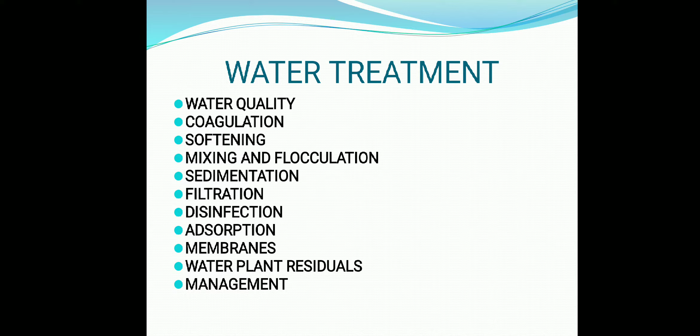Water quality. Precipitation in the form of rain, hail, or sleet contains very few impurities. It may contain trace amounts of mineral matter, gases, and other substances as it forms and falls through the Earth's atmosphere. The precipitation, however, has virtually no bacterial content. Once precipitation reaches the Earth's surface, many opportunities are presented for the introduction of mineral and organic substances, microorganisms, and other forms of pollution.

When water runs over or through the ground surface, it may pick up particles of soil. This is noticeable in the water as cloudiness or turbidity. It also picks up particles of organic matter and bacteria.

As surface water seeps downward into the soil and through the underlying material to the water table, most of the suspended particles are filtered out. This natural filtration may be partially effective in removing bacteria and other particulate materials.

There are four categories used to describe drinking water quality. First is the physical, second is the chemical, third is the microbiological, and lastly is the radiological.

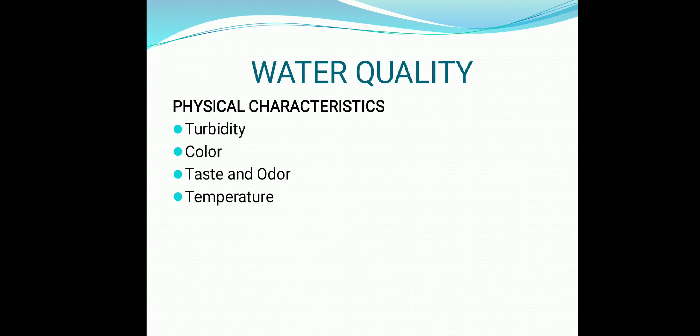Physical characteristics includes turbidity of the water, color, taste and odor, and temperature. Turbidity is the presence of suspended materials such as clay, silt, finely divided organic material, plankton, and other particulate material in water.

Color is dissolved organic material from decaying vegetation, and certain inorganic matter cause color in water. Occasionally, excessive blooms of algae or the growth of aquatic microorganisms may also impart color.

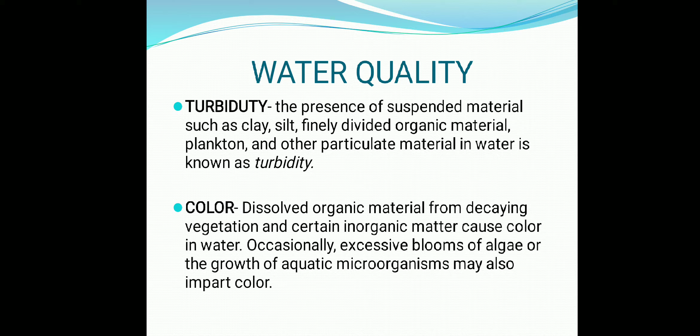Taste and odor in water can be caused by foreign matters such as organic compounds, inorganic salts, or dissolved gases. These materials may come from domestic, agricultural, or natural sources.

Temperature. The most desirable drinking waters are consistently cool and do not have temperature fluctuations of more than a few degrees. Groundwater and surface water from mountainous areas generally meet these criteria.

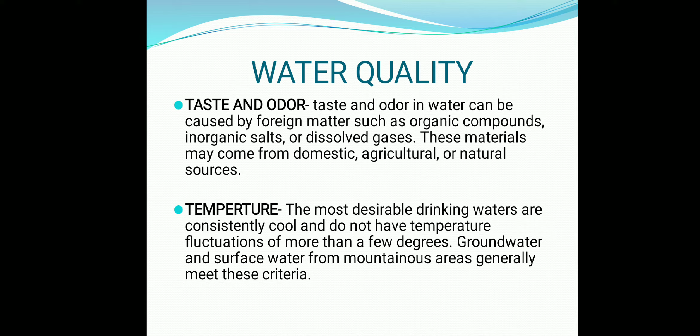In chemical characteristics, there are classifications of chloride, fluoride, iron, lead, manganese, sodium, sulfate, zinc, arsenic, toxic inorganic substance, and toxic organic substance.

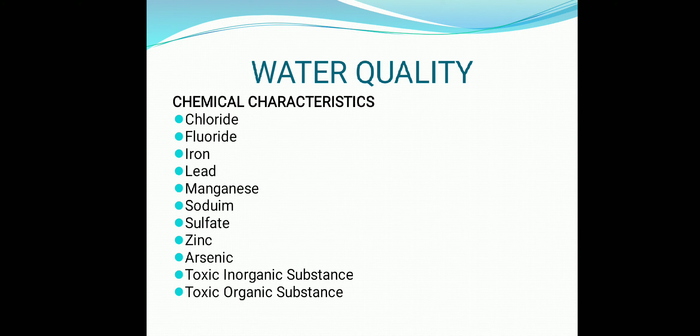Chloride. Most waters contain some chloride. The amount present can be caused by leaching of marine sedimentary deposits or by pollution from sea water, brine, or industrial or domestic wastes. Fluoride: in some areas, water sources contain natural fluoride.

In some areas, water sources contain natural fluoride. Where the concentration approaches optimum levels, beneficial health effects have been observed.

Iron. Small amounts of iron frequently are present in water because of the large amount of iron in the geological materials. The presence of iron in water is considered objectionable because it imparts a brownish color to laundered goods and affects the taste of beverages such as tea and coffee.

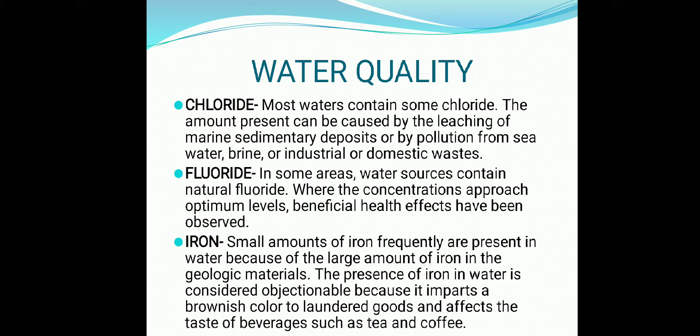Lead. Exposure of the body to lead, however brief, can be seriously damaging to health. Prolonged exposure to relatively small quantities may result in serious illness or death. Lead taken into the body in quantities in excess of certain relatively low normal limits is a cumulative poison.

Manganese imparts a brownish color to water and to cloth that is washed in it. It flavors coffee and tea with a medicinal taste.

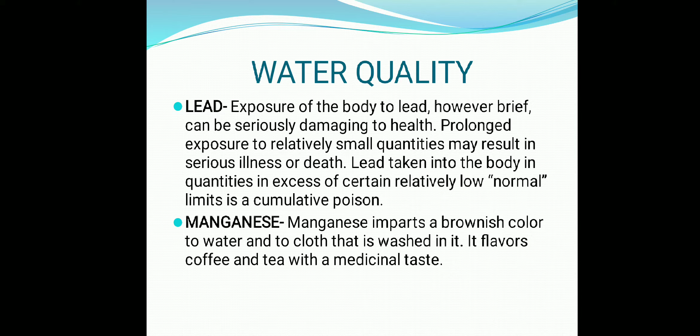Sodium. The presence of sodium in water can affect persons suffering from heart, kidney, or circulation ailments.

Sulfate. Waters containing high concentrations of sulfate caused by leaching of natural deposits of magnesium sulfate or sodium sulfate may be undesirable because of their laxative effects.

Zinc is found in some natural waters, particularly in areas where zinc ore deposits have been mined. Zinc is not considered detrimental to health, but it will impart an undesirable taste to drinking water.

Arsenic occurs naturally in the environment and is also widely used in timber treatment, agricultural chemicals, and manufacturing of gallium arsenide wafers, glass, and alloys. Arsenic in drinking water is associated with lung and urinary bladder cancer.

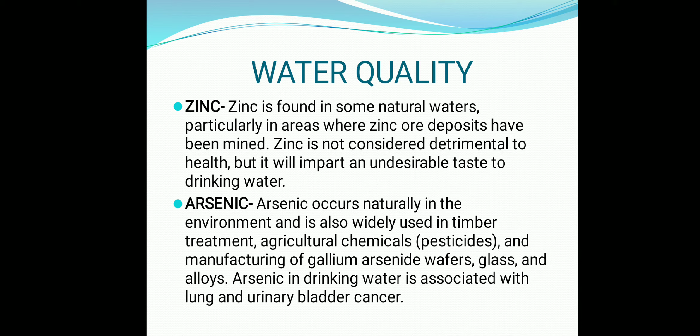Toxic inorganic substances. Nitrates, cyanides, and heavy metals constitute the major classes of inorganic substances of health concern. Methemoglobinemia, or infant cyanosis, also known as blue baby syndrome, has occurred in infants who have been given water or fed formula prepared with water having high concentrations of nitrate.

Toxic organic substances. There are over 120 organic compounds listed in the U.S. Environmental Protection Agency's Priority Pollutant List. These include pesticides, insecticides, and solvents. Like the inorganic substances, their effects may be acute or chronic.

Microbiological characteristics: water for drinking and cooking purposes must be made free from disease-producing organisms or pathogens. These organisms include viruses, bacteria, protozoa, and helminths. Some organisms which cause disease in people originate from the fecal discharges of infected individuals, while others come from the fecal discharge of animals.

Radiological characteristics: development of atomic energy as a power source, mining of radioactive materials, and naturally occurring radioactive materials have made it necessary to establish limiting concentrations for the intake of radioactive substances into the body, including through drinking water. The effects of human exposure to radiation are harmful, and any unnecessary exposure should be avoided, though humans have always been exposed to natural radiation from water, food, and air.

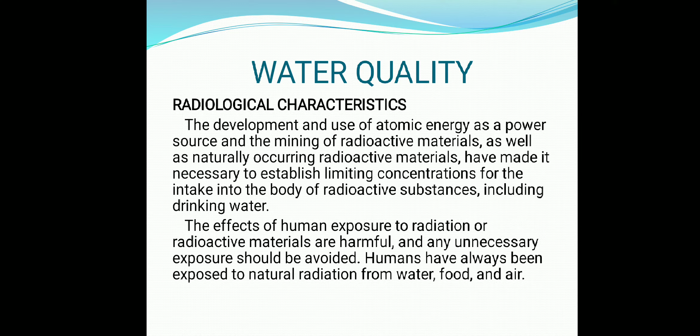Let's proceed to water classification and treatment systems. Potable water is most conveniently classified by its source, that is groundwater or surface water. Generally, groundwater is uncontaminated but may contain aesthetically or economically undesirable impurities, though it can be influenced by man-made spills and become contaminated. Surface water must be considered contaminated with bacteria, viruses, or inorganic substances that could present a health hazard.

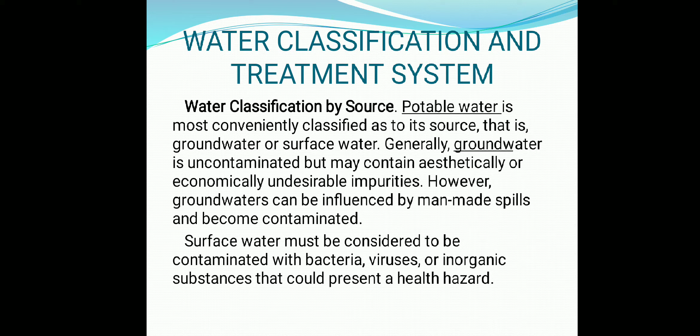Treatment systems can be classified as simple disinfection, filter plants, or softening plants. Plants employing simple chlorination are usually groundwater sources with high water quality, chlorinating to ensure the water reaching customers contains safe bacterial levels. A groundwater source can contain naturally occurring contaminants such as arsenic, fluoride, radionuclides, iron, or manganese. In this case, the water may be treated by adsorption, ion exchange, or precipitation processes to remove the contaminant.

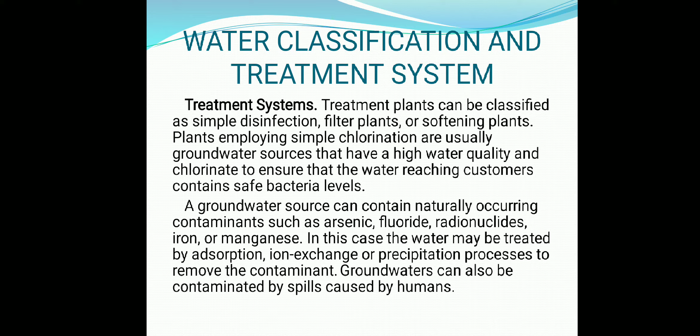Groundwaters can also be contaminated by human-caused spills. In a filtration plant, rapid mixing, flocculation, sedimentation, filtration, and disinfection are employed to remove color, turbidity, taste and odors, organic matter, and bacteria.

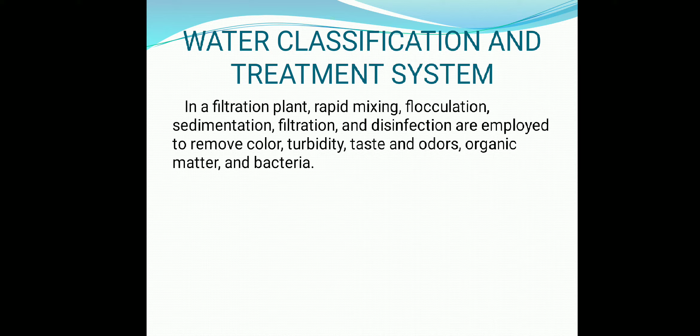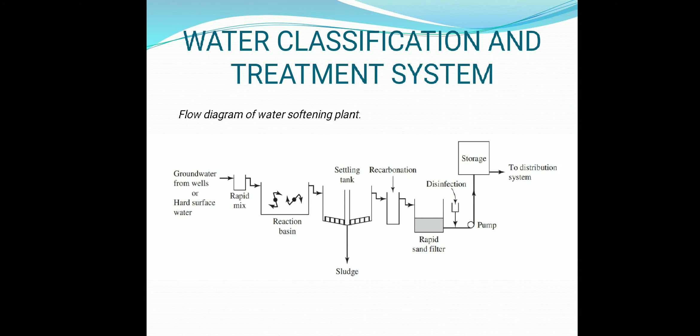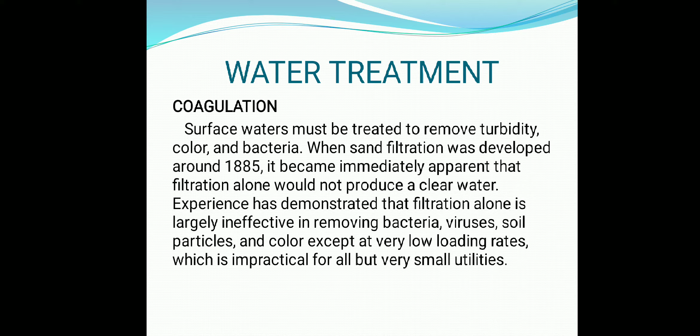Now let's proceed to water treatment, first the coagulation process. Surface waters must be treated to remove turbidity, color, and bacteria. When sand filtration was developed around 1885, it became immediately apparent that filtration alone would not produce clear water. Experience has demonstrated that filtration alone is largely ineffective in removing bacteria, viruses, soil particles, and color, except at very low loading rates, which is impractical for all but very small utilities.

The objective of coagulation and subsequent flocculation is to turn the small particles of color, turbidity, and bacteria into large flocs, either as precipitates or suspended particles. These flocs are then conditioned so that they will be readily removed in subsequent processes.

Technically, coagulation applies to the removal of colloidal particles, and in this chapter coagulation will refer to colloid removal only. We define coagulation as a method to alter the colloids so that they are able to approach and adhere to each other, forming larger flocculated particles.

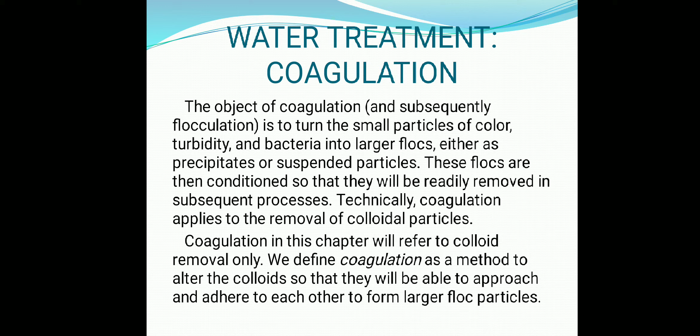Colloid stability: colloids are suspended in solution and can't be removed by sedimentation or filtration. The particles in the colloid range are too small to settle in a reasonable time period and too small to be trapped in the pores of a filter. For colloids to remain stable, they must remain small. Most colloids are stable because they possess a negative charge that repels other colloidal particles before they collide with one another.

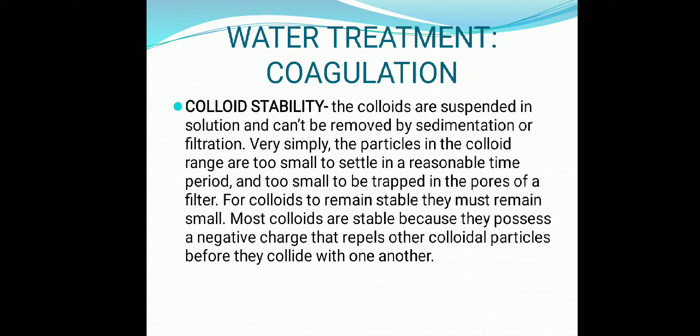Colloid stabilization: colloids are stable because of their surface charge. In order to destabilize the particles, we must neutralize this charge. Some neutralization can take place by the addition of an ion of opposite charge to the colloid. Since most colloids found in water are negatively charged, the addition of a sodium ion, Na+, should reduce the charge.

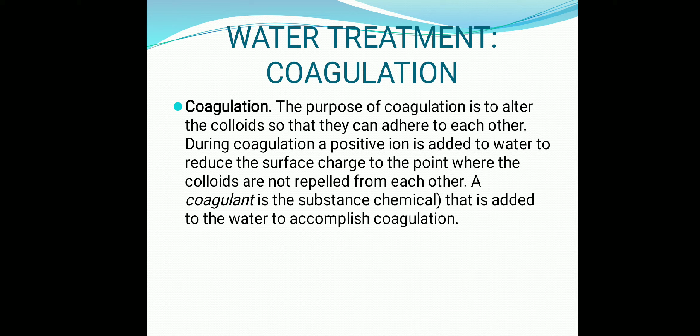Coagulation: the purpose of coagulation is to alter the colloids so that they can adhere to each other. During coagulation, a positive ion is added to the water to reduce the surface charge to the point where the colloids are not repelled from each other. A coagulant is a chemical substance that is added to water to accomplish coagulation.

There are three key properties of a coagulant. First is trivalent cation: as indicated previously, the colloids most commonly found in natural waters are negatively charged, hence a cation is required to neutralize the charge, and a trivalent cation is the most efficient cation.

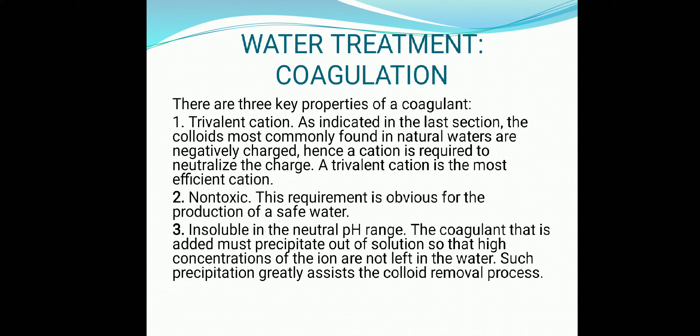The second property is non-toxic, which is obvious for the production of safe water. The third is insoluble in the neutral pH range: the coagulant added must precipitate out of solution so that high concentrations of the ion are not left in the water, as such precipitation greatly assists the colloid removal process.

So, the four basic types of coagulant aids are: first, the pH adjuster; second, activated silica; third, clay; and fourth, polymers.

Let's proceed to softening. First, a classification is hardness. The term hardness is used to characterize a water that does not lather well, causes a scum in the bathtub, and leaves hard, white, crusty deposits or scale on coffee pots, tea kettles, and hot water heaters. The failure of lather and the formation of scum on bathtubs is the result of the reactions of calcium and magnesium with the soap.

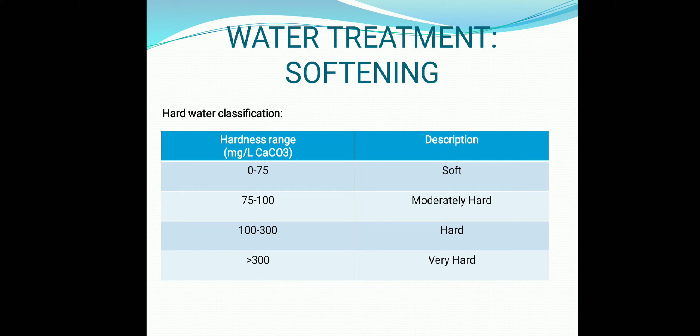So hard water classification has ranges, from milligram per liter. In the description: 0 to 75 is soft, 75 to 100 is moderately hard, 100 to 300 is hard, and greater than 300 is very hard.

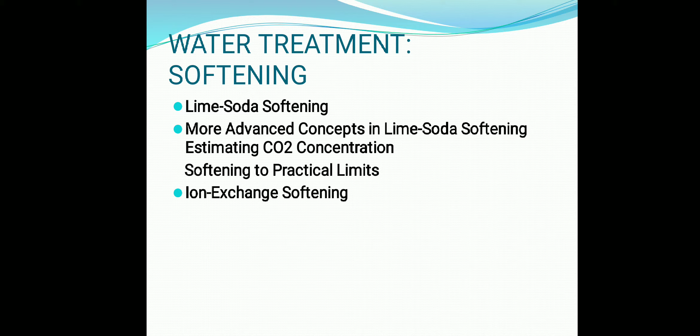Lime soda softening model. More advanced concepts in lime soda softening include estimating carbon dioxide concentration, softening to practical limits, and ion exchange softening.

Mixing and flocculation. Mixing, or rapid mixing as it is called, is the process whereby chemicals are quickly and uniformly dispersed in the water. Ideally, the chemicals would be instantaneously dispersed throughout the water.

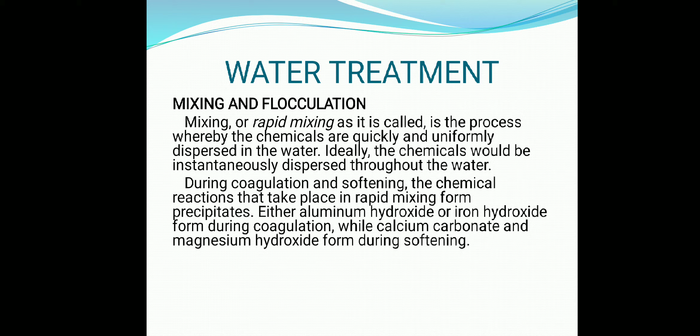During coagulation and softening, the chemical reactions that take place in rapid mixing form precipitates. Either aluminum hydroxide or iron hydroxide forms during coagulation, while calcium carbonate and magnesium hydroxide form during softening.

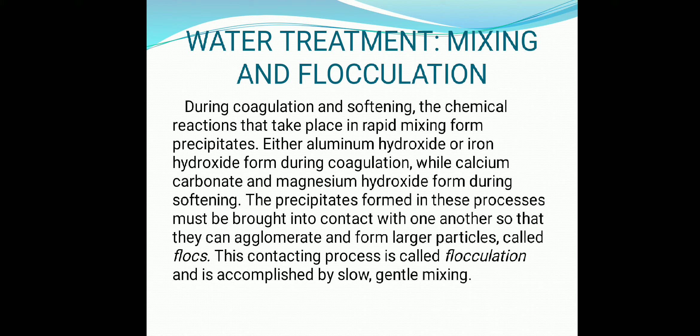The precipitates formed in these processes must be brought into contact with one another so that they can agglomerate and form larger particles, called floc. This contacting process is called flocculation and is accomplished by slow, gentle mixing.

In the treatment of water and wastewater, the degree of mixing is measured by the velocity gradient G. The velocity gradient is best thought of as the amount of shear taking place; the higher the G value, the more violent the mixing.

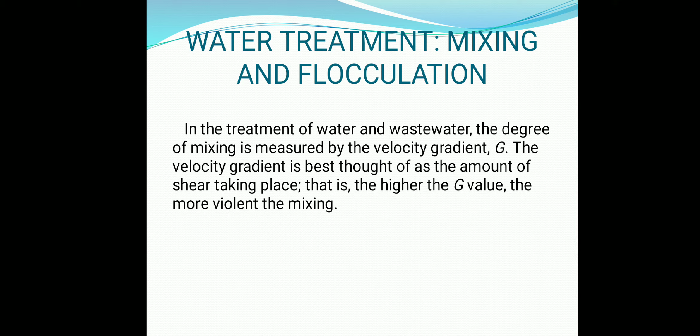Rapid mix: rapid mixing is probably the most important physical operation affecting coagulant efficiency. Rapid mixing can be accomplished within a tank utilizing a vertical shaft mixer.

Flocculation. The objective of flocculation is to bring particles into contact so that they will collide, stick together, and grow to a size that will readily settle. Enough mixing must be provided to bring the floc into contact and to keep the floc from settling in the flocculation basin.

Sedimentation: particles that will settle within a reasonable period of time can be removed in a sedimentation basin, also called a clarifier. Sedimentation basins are usually rectangular or circular with either a radial or upward water flow pattern. Regardless of the type of basin, the design can be divided into four zones: inlet, settling, outlet, and sludge storage.

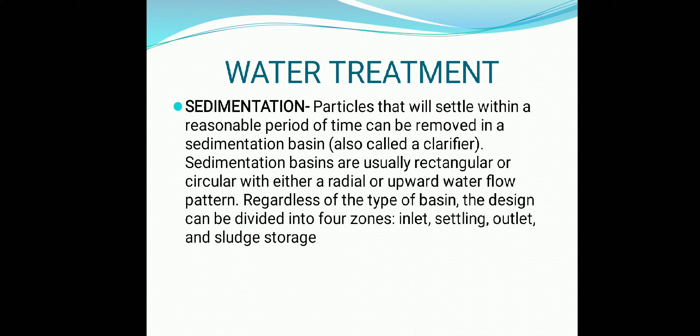So, these are the zones of a sedimentation tank.

Sedimentation concept: there are two important terms to understand in sedimentation zone design. The first is the particle settling velocity. The second is the velocity at which the tank is designed to operate, called the overflow rate.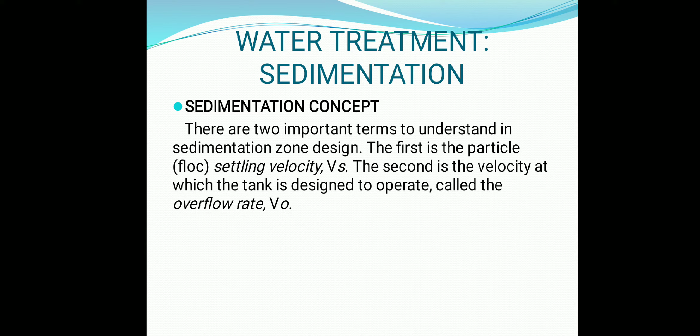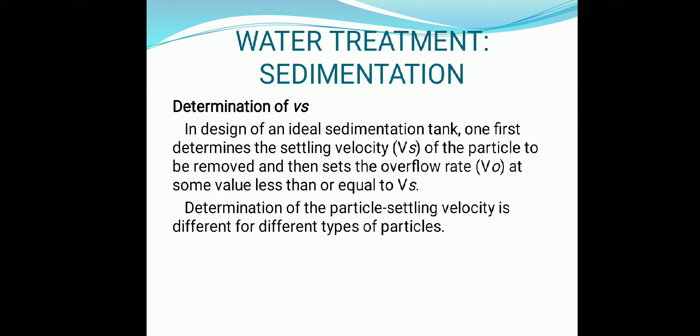Determination of velocity: in the design of an ideal sedimentation tank, one first determines the settling velocity of the particle to be removed, then sets the overflow rate at some value less than or equal to the settling velocity. Determination of the particle settling velocity is different for different types of particles.

Settling properties of particles are often categorized into one of three classes. Type 1 sedimentation is characterized by particles that settle discretely at a constant settling velocity. They settle as individual particles and do not flocculate or stick to other particles during settling. Examples of these particles are sand and grit material. Generally speaking, the only application of type 1 settling is during pre-sedimentation for sand removal prior to coagulation in a potable water plant, and settling of sand particles during cleaning of rapid sand filters and in grit chambers.

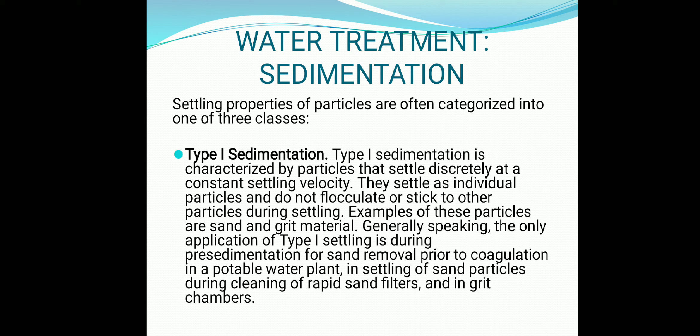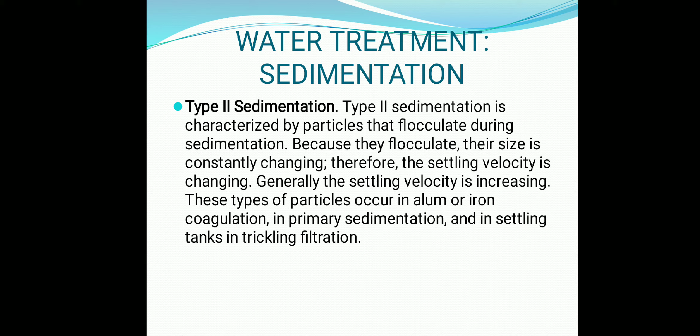Type 2 sedimentation is characterized by particles that flocculate during sedimentation. Because they flocculate, their size is constantly changing, and therefore the settling velocity is changing—generally increasing. This type of particle occurs in alum or iron coagulation, in primary sedimentation, and in settling tanks in trickling filtration.

Type 3, or zone sedimentation: in zone sedimentation, the particles are at high concentration, greater than 1,000 mg per liter, such that the particles tend to settle as a mass, and a distinct clear zone and sludge zone are present. Zone settling occurs in lime softening sedimentation, activated sludge sedimentation, and sludge thickening.

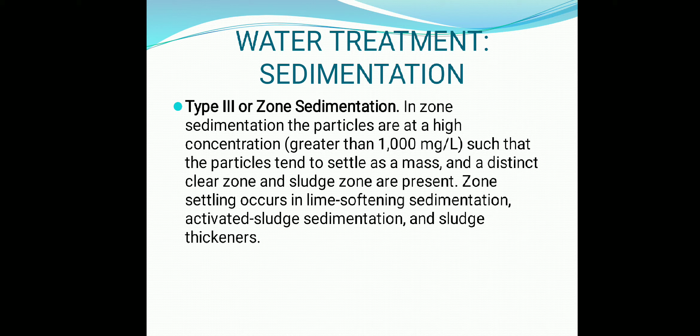Determination of velocity: there are different ways to determine effective particle settling velocity and consequently to determine overflow rates. First is discrete settling. In the case of type 1 sedimentation, the particle's settling velocity can be calculated and the basin designed to remove a specific size particle.

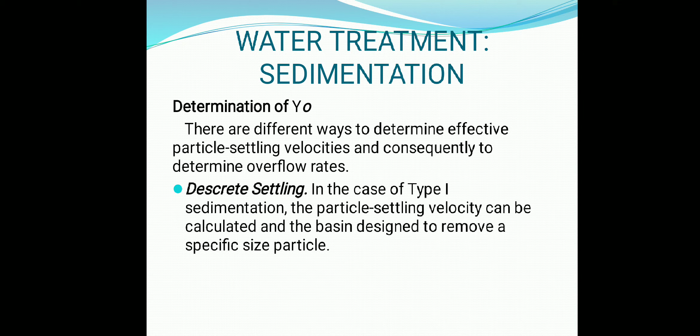Next treatment is filtration. Water filtration is a process for separating suspended or colloidal impurities from water by passage through a porous medium, usually a bed of sand or other medium. Water fills in the pores, the open spaces between the sand particles, and the impurities are left behind, either clogged in the open spaces or attached to the sand itself.

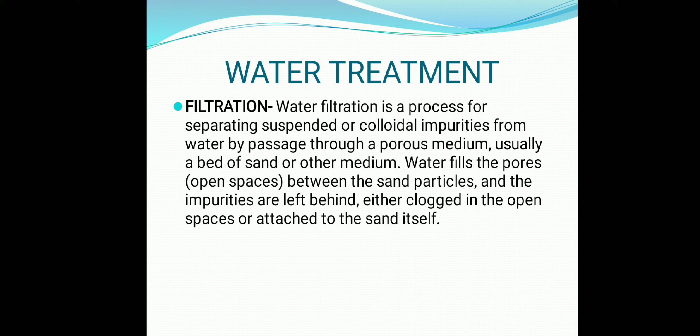Methods of classifying filters: according to the type of medium used, such as sand, coal called anthracite, dual media, or mixed media; and by allowable loading rate, which is the flow rate of water applied per unit area of the filter. It is the velocity of the water approaching the face of the filter.

Disinfection is used in water treatment to reduce pathogens to an acceptable level. Disinfection is not the same as sterilization. Sterilization implies the destruction of all living organisms. Drinking water does not need to be sterile. Three categories of human enteric pathogens are normally of consequence: bacteria, virus, and amoebic cysts. Purposeful disinfection must be capable of destroying all three.

To be of practical service, such water disinfectants must possess the following properties. They must destroy the kinds and numbers of pathogens that may be introduced into water within a practicable period of time over an expected range in water temperature.

They must meet possible fluctuations in composition, concentration, and condition of waters or wastewater to be treated. They must be neither toxic to humans and domestic animals, nor unpalatable or otherwise objectionable in required concentrations.

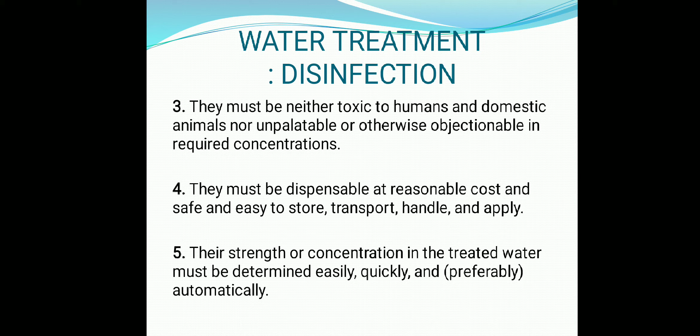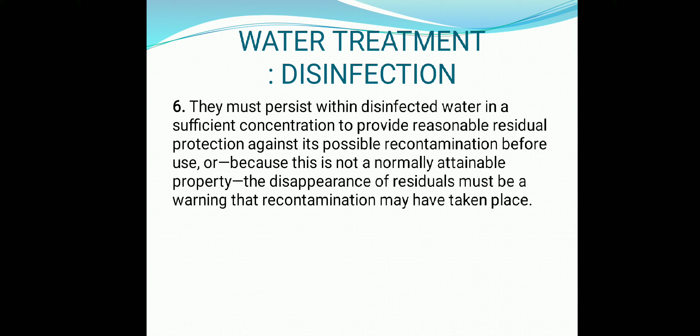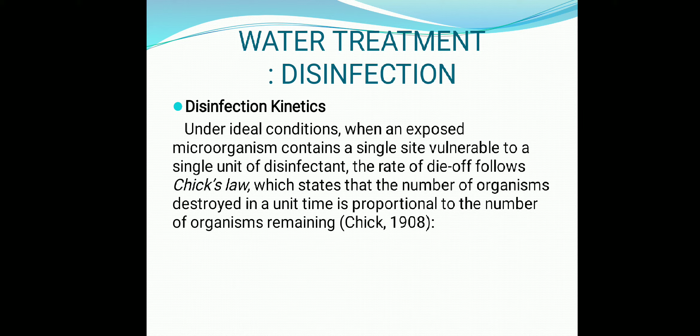Chlorine reaction in water. Chlorine is the most common disinfecting chemical used. The term chlorination is often used synonymously with disinfection. Chlorine may be used as the element Cl2, as sodium hypochlorite, and or calcium hypochlorite. When chlorine is added to water, a mixture of hypochlorous acid and hydrochloric acid is formed.

Chlorine disinfecting action. Chlorine disinfection involves a very complex series of events and is influenced by the kind and extent of reactions with chlorine-reactive materials, including nitrogen, temperature, pH level, availability of test organisms, and numerous other factors. Such factors greatly complicate attempts to determine the precise mode of action of chlorine on bacteria and other microorganisms.

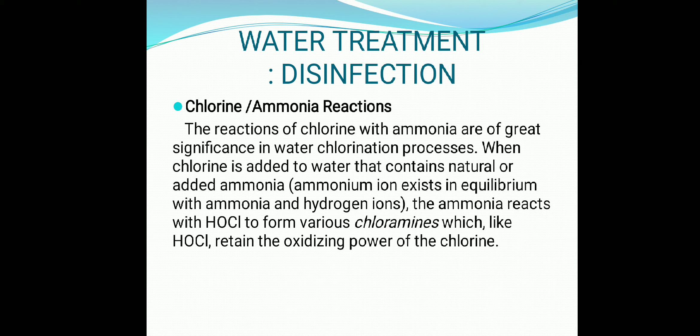Chlorine-ammonia reactions. The reactions of chlorine with ammonia are of great significance in water that contains natural or added ammonia. The ammonia reacts with hypochlorous acid to form various chloramines which, like hypochlorous acid, retain the oxidizing power of the chlorine.

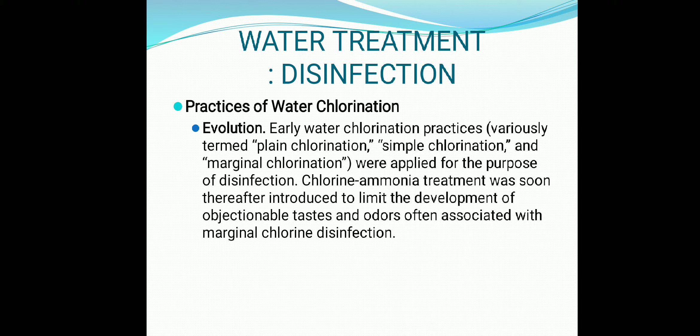Practices of water chlorination: the evolution. Early water chlorination practices, variously termed plain chlorination, simple chlorination, and marginal chlorination, were applied for the purpose of disinfection. Chlorine-ammonia treatment was soon thereafter introduced to limit the development of objectionable tastes and odor, often associated with marginal chlorine disinfection.

Combined residual chlorination. Combined residual chlorination practice involves the application of chlorine to water in order to react with natural or added ammonia, producing a combined available chlorine residual, and to maintain that residual throughout part or all of a water treatment plant or distribution system.

Free residual chlorination. Free residual chlorination practice involves the application of chlorine to water to produce, either directly or through the destruction of ammonia, a free available chlorine residual, and to maintain that residual throughout part or all of a water treatment plant or distribution system. Free available chlorine forms have higher oxidation potentials than combined available chlorine forms and therefore are more effective as oxidants.

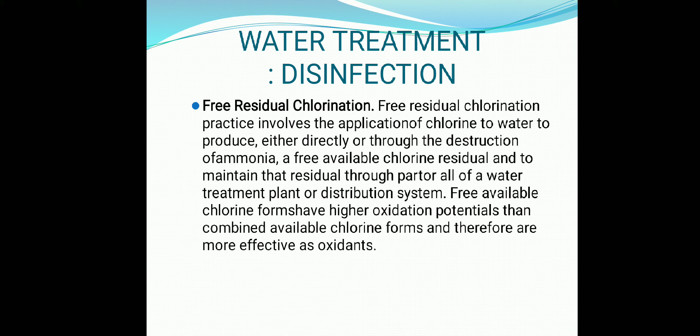Chlorine dioxide. Another very strong oxidant is chlorine dioxide, formed on-site by combining chlorine and sodium chlorite. Chlorine dioxide is often used as a primary disinfectant, inactivating bacteria and cysts, followed by the use of chloramine as a distribution system disinfectant. Chlorine dioxide does not maintain a residual long enough to be useful as a distribution system disinfectant. The advantage of chlorine dioxide over chlorine is that chlorine dioxide does not react with precursors to form THMs.

Ozonation. Ozone is a pungent smelling, unstable gas. It is a form of oxygen in which three atoms of oxygen combine to form the molecule O3. Because of its instability, it is generated at the point of use. The ozone generating apparatus is commonly a discharge electrode. To reduce corrosion of the generating apparatus, air is passed through a drying process and then into the ozone generator.

Advanced oxidation process. Advanced oxidation processes are combinations of disinfectants designed to produce hydroxyl radicals. Hydroxyl radicals are highly reactive, non-selective oxidants able to decompose many organic compounds. Most noteworthy of the advanced oxidation processes is ozone plus hydrogen peroxide.

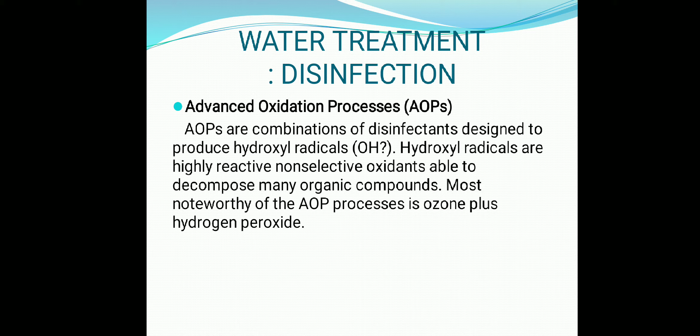Adsorption. Adsorption is a mass transfer process wherein a substance is transferred from the liquid phase to the surface of a solid where it is bound by chemical or physical forces. Generally, in water treatment, the adsorption solid is activated carbon, either granular or powdered, PAC.

Powdered activated carbon, PAC, is fed to the raw water in a slurry and is generally used to remove taste and odor causing substances, or to provide some removal of synthetic organic chemicals.

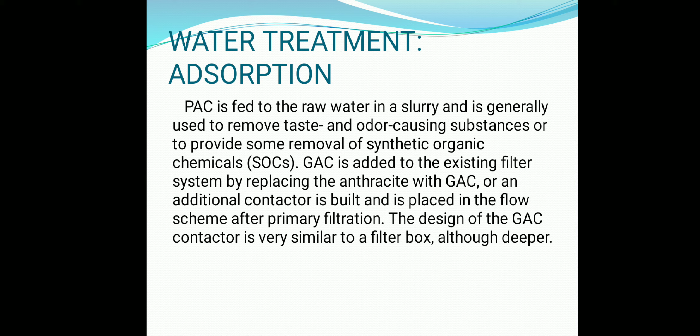GAC is added to the existing filter system by replacing the anthracite with GAC, or an additional contactor is built and placed into the flow scheme after primary filtration. The design of a GAC contactor is very similar to the filter box, although deeper.

Membranes. A membrane is a thin layer of material capable of separating materials as a function of their physical and chemical properties when a driving force is applied across the membrane. In water treatment, the driving force is applied using a high-pressure pump, and the membrane type is selected based on the constituents to be removed.

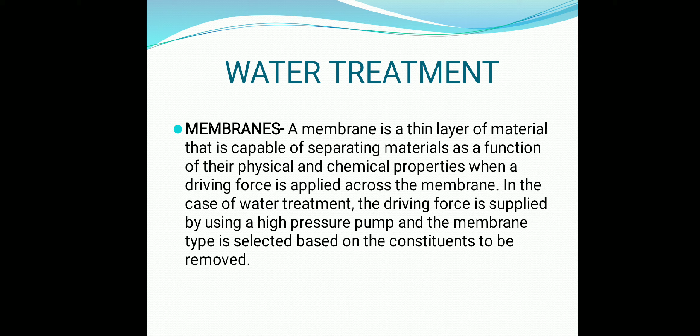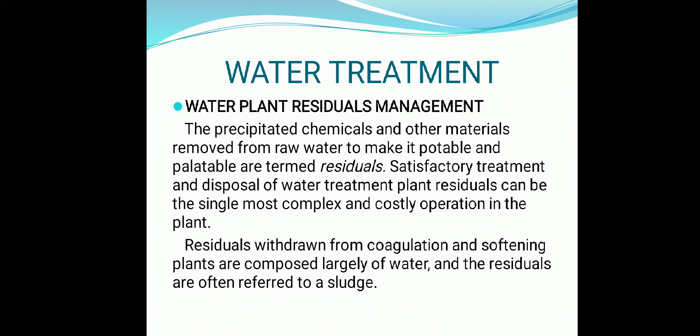Water plant residuals management. Precipitated chemicals and other materials removed from raw water to make it potable and palatable are termed residuals. Satisfactory treatment and disposal of water treatment plant residuals can be the single most complex and costly operation in the plant. Residuals withdrawn from coagulation and softening plants are composed largely of water, and the residuals are often referred to as sludge.

Water plant and residual management. As much as 98% of the sludge mass may be water. Thus, for example, 20 kg of solid chemical precipitate is accompanied by 980 kg of water. Assuming equal densities for the precipitate and water, approximately 1 cubic meter of sludge is produced for each 20 kg of chemicals added to the water.

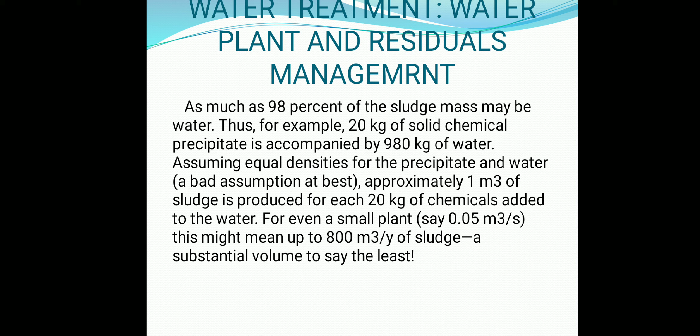For even a small plant, this might mean up to 800 cubic meters per year of sludge, a substantial volume to say the least. Water treatment plant residuals can be broadly divided into four general categories.

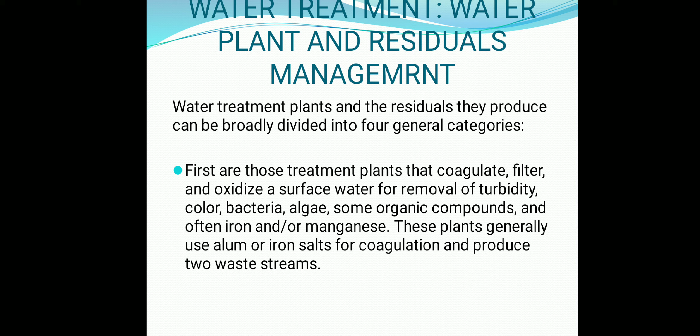First are those treatment plants that coagulate, filter, and oxidize a surface water for removal of turbidity, color, bacteria, algae, some organic compounds, and often iron and or manganese. These plants generally use alum or iron salts for coagulation and produce two waste streams.

The second type of treatment plants are those that practice softening and removal of calcium and magnesium by the addition of lime, sodium hydroxide, and or soda ash. These plants produce clarifier basin sludge and SFBW.

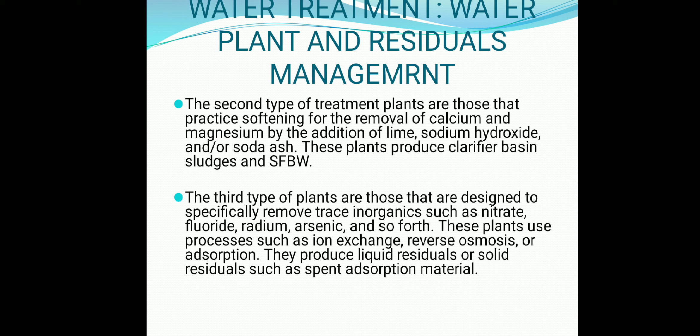The third type of plants are those designed to specifically remove trace inorganics such as nitrate, fluoride, radium, arsenic, and so forth. These plants use processes such as ion exchange, reverse osmosis, or adsorption, and they produce liquid residuals or solid residuals such as spent adsorption material.

The fourth category of treatment plants are those that produce air phase residuals during the stripping of volatile compounds. The major types of treatment plant residuals produced are shown in Table 6-19. Because 95% of the residuals produced are coagulant or softening sludge, they will be stressed in this section.

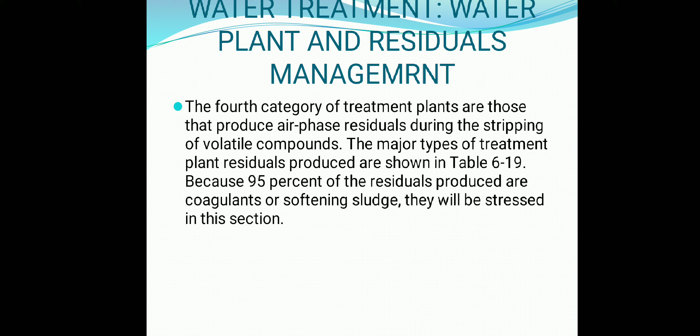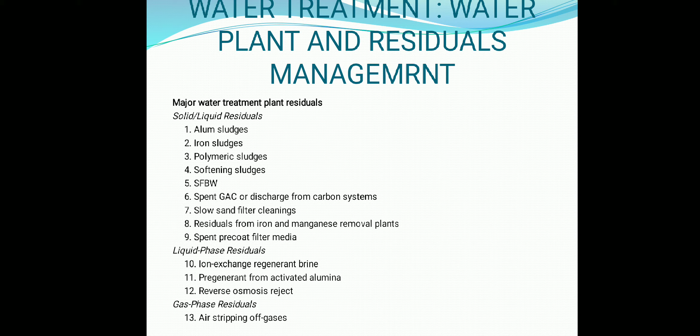Liquid phase residuals include ion exchange regenerant brine and regenerant from activated alumina, as well as reverse osmosis reject. Gas phase residuals come from air stripping off-gases.

The most logical sludge management program attempts to use the following approach in disposing of the sludge: first, minimization of sludge generation; chemical recovery of precipitates; sludge treatment to reduce volume; and alternate disposal in an environmentally safe manner. Sludge production and characteristics: in water treatment plants, sludge is most commonly produced in the following treatment processes: pre-sedimentation, sedimentation, and filtration.

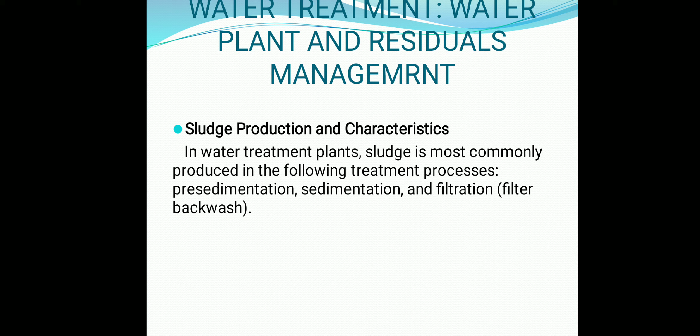Pre-sedimentation: when surface waters withdrawn from watercourses contain a large quantity of suspended materials, pre-sedimentation prior to coagulation may be practiced. The purpose is to reduce the accumulation of solids in subsequent units. The settled material generally consists of fine sands, silt, clays, and organic decomposition products.

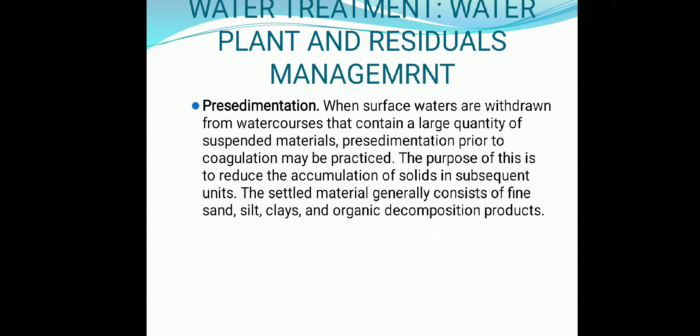Softening sedimentation basin: the residues from softening by precipitation with lime and soda ash will vary from a nearly pure chemical to a highly variable mixture. The softening process discussed earlier in this chapter produces a sludge containing primarily calcium carbonate and...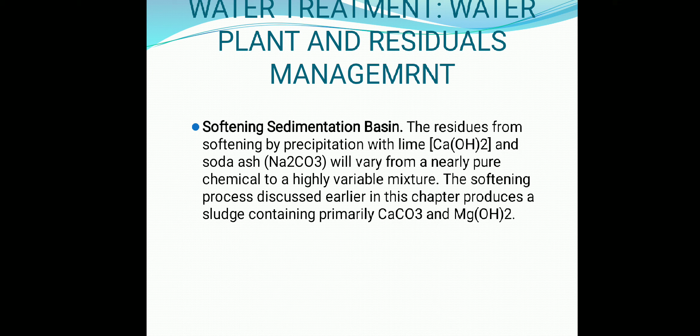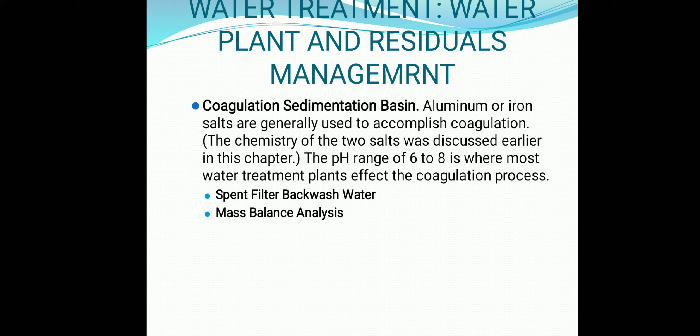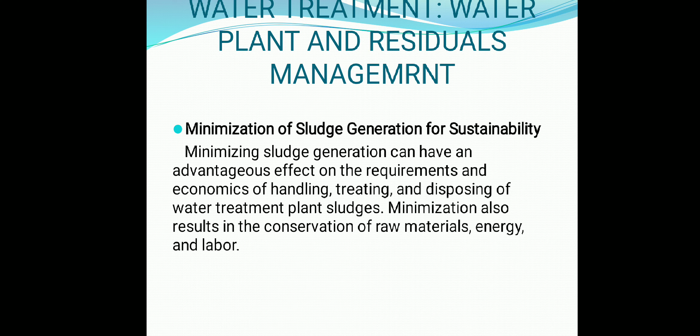Minimization of sludge generation for sustainability. Minimizing sludge can have an advantageous effect on the requirements and economics of handling, treating, and disposing of water treatment plant sludges. Minimization also results in conservation of raw materials, energy, and labor.

There are three methods to minimize the quantity of metal hydroxide precipitates in the sludge: first, changing the water treatment process to direct filtration; substituting other coagulants, in particular using polymers that are more effective at lower dosage; and conserving chemicals by determining optimum dosage at frequent intervals as raw water characteristics change.

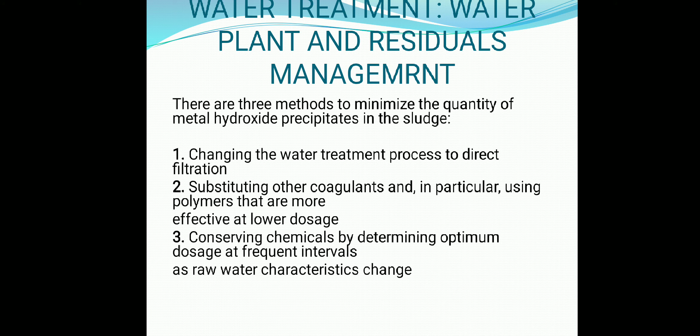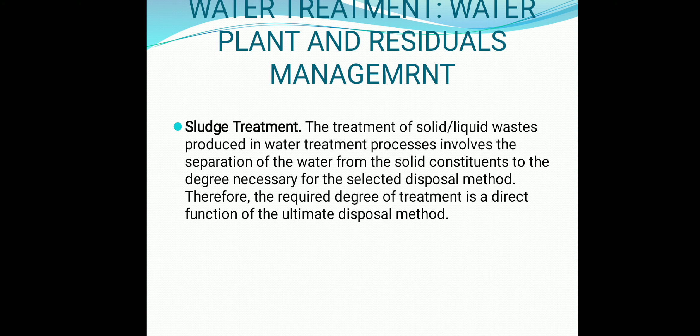Sludge treatment: the treatment of solid-liquid waste produced in water treatment processes involves separation of the water from the solid constituents to the degree necessary for the selected disposal method. Therefore, the required degree of treatment is a direct function of the ultimate disposal method.

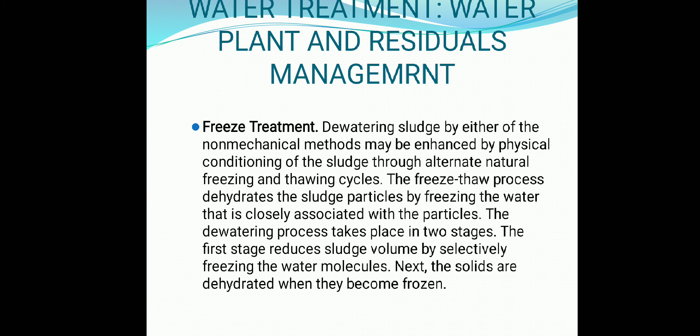Centrifuging: a centrifuge uses centrifugal force to speed up the separation of sludge particles from the liquid. In a typical unit, sludge is pumped into a horizontal cylindrical bowl rotating 800 to 2000 revolutions per minute. Polymers used for sludge conditioning are also injected into the centrifuge. The solids are spun to the outside of the bowl, where they are scraped out by the screw conveyor. The liquid, or centrate, is returned to the treatment plant.

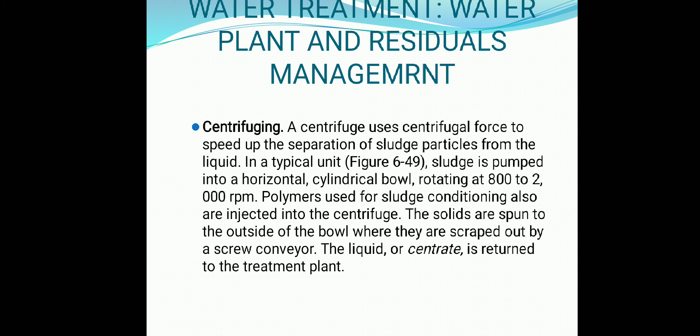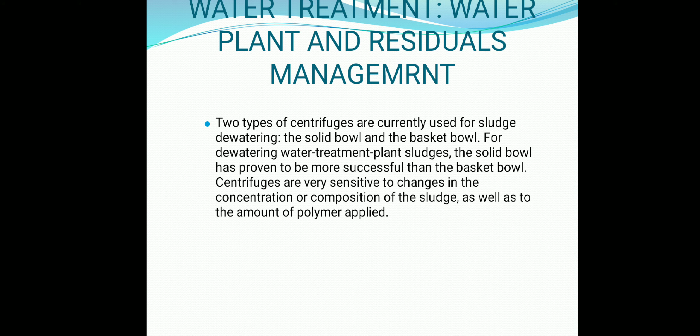Two types of centrifuges are currently used for sludge dewatering: the solid bowl and the basket bowl. For dewatering water treatment plant sludges, the solid bowl has proven more successful than the basket bowl.

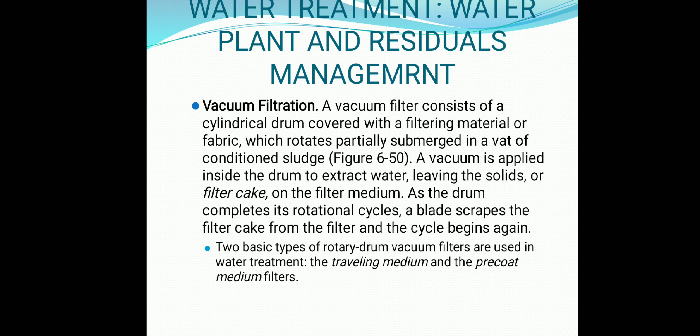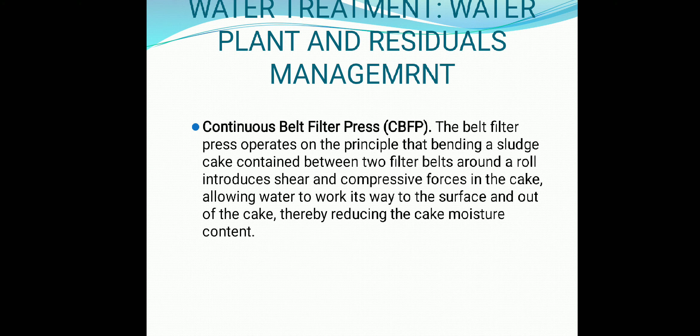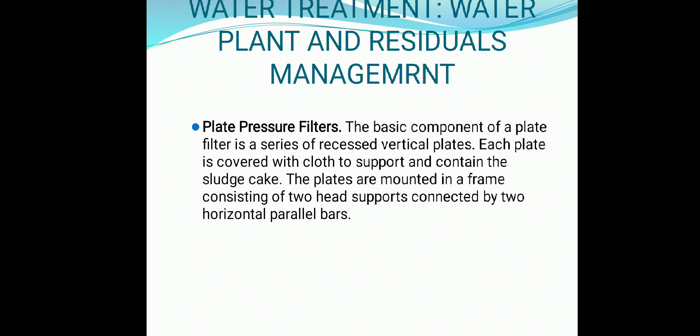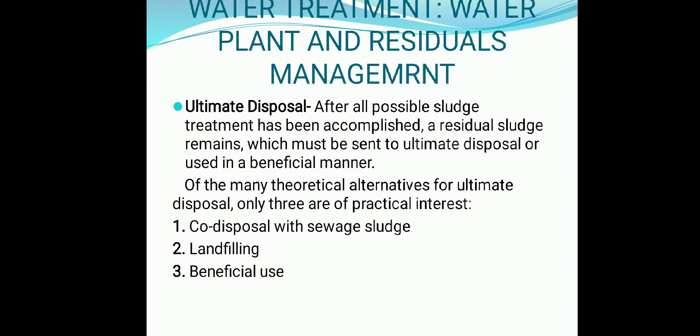Ultimate disposal: after all possible sludge treatment has been accomplished, residual sludge remains and must be sent to ultimate disposal or used in a beneficial manner. Of the many theoretical alternatives for ultimate disposal, only three are of practical interest: co-disposal with sewage sludge, landfilling, and beneficial use.

And that was my report about water treatment.